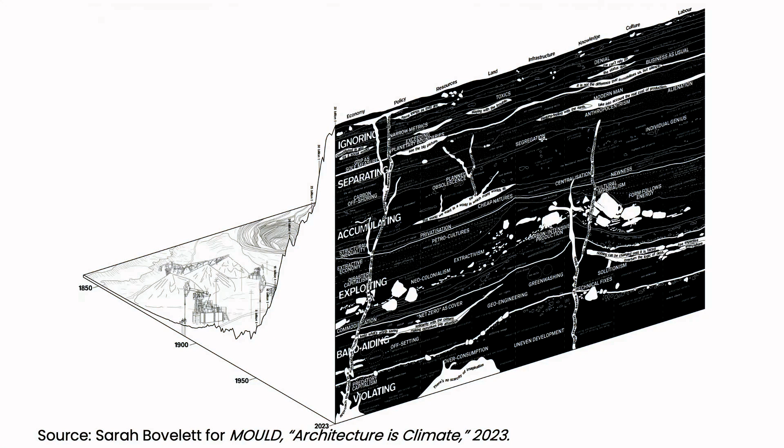And I love this diagram that compresses everything from the 19th century to the contemporary condition, showing how our practice is sort of part of the problem, I dare say. I love our practice because it is so manifold, but we also have to acknowledge that its extractive nature in resources or labor, and the role we play in capital accumulation, is part of trying to understand architecture as climate. So not so much what we can do, but really intrinsically delve into it.

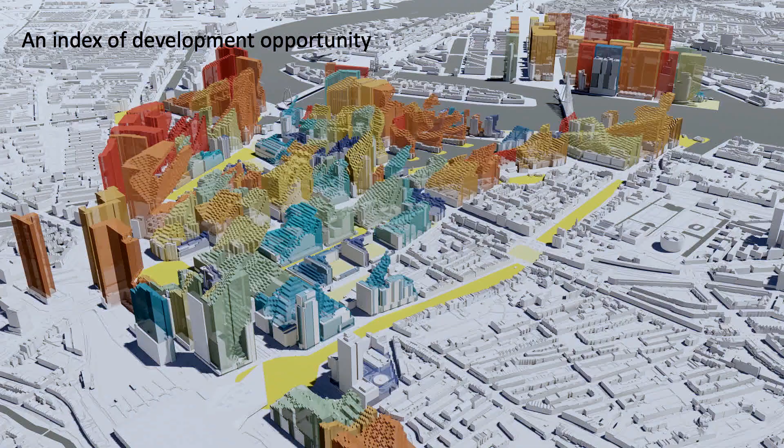And we create software. This is Roofscape. This is software we created with and for the municipality of Rotterdam that actually calculates and quantifies the impact of rooftop policies. We also created Solarscape. This is a software that identifies and visualizes densification potential in the city based on the high-rise regulation and sunspots. We also create parametric urbanism. This is a master plan in Bordeaux that's completely shaped by sun and daylight regulations.

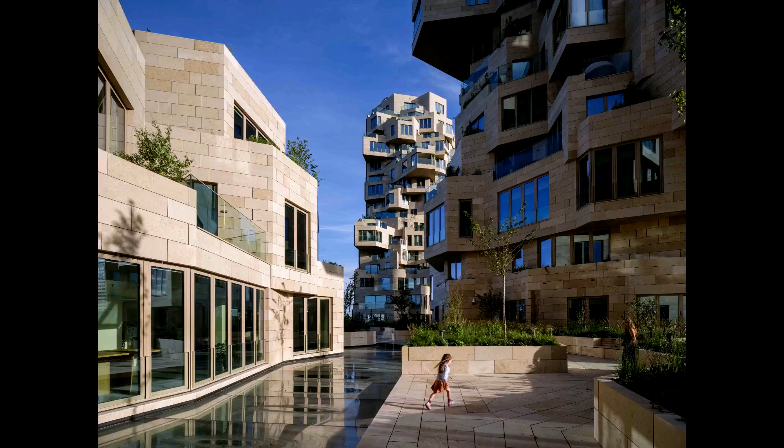We actually created a software that designed and drew the facade of the Valley in Amsterdam. We created a custom workflow from Revit to Rhino to Grasshopper and back that drew 44,000 tiles in 27 revisions, resulting in minimal loss of material.

This means we can do a lot of stuff with computers, and we figured we actually do quite a lot with sunlight, with daylight, with regulations, with materials. We can do environmental analyses.

This is kind of linked to sustainability. So what we did is we actually merged our sustainability group and our computational group together into one group, which is MVRDV Next, New Experimental Technologies. This is not all the team, but we're currently 15 people working full-time on computation and sustainability together.

Sustainability is a fascinating world, a fascinating term. For us, it's a bit like a river. It flows in one direction because it wants to achieve one thing, which is a better world. But if you look at the stream, you see that the water goes in all these different directions. If you think about sustainability, you see that it's such a broad, multi-headed monster, and there are so many things to consider and think about.

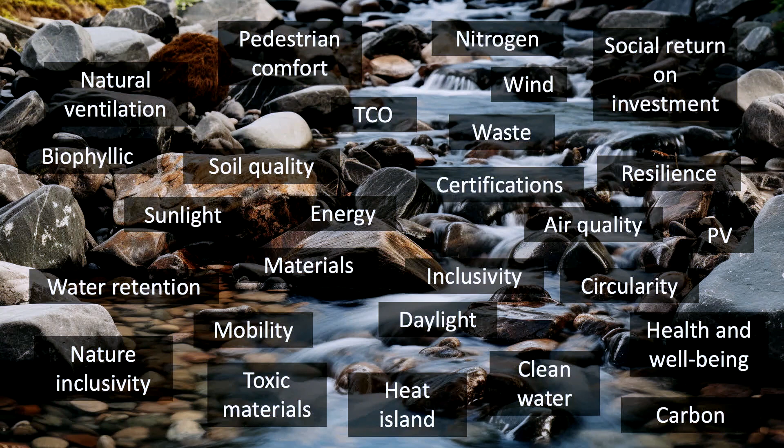You have wind, resilience, social return on investment, water retention. These are all things we want to address as architects in our designs. But if you try to address all of these, you can end up spreading the peanut butter too thin, trying to do a bit of everything, and sometimes you end up with not really impactful results.

So that's why we said to ourselves, we are going to focus on carbon. Carbon is something that is incredibly important. This is causing climate change.

We focus on carbon. There was a big step we took three years ago when we started our core team within MVRDV that researches and works with carbon. We've been doing this for three years, looking into carbon, specifically embodied carbon. Why embodied carbon? Because this is what we draw on a daily basis. This is what we draw and build now.

Then we started to collaborate and talk to people. And somehow, there was also urban carbon and carbon capture, and energy is also kind of related to carbon, and you have sequestration, measuring, software and tools, and before you know it, you're back again into this big multi-headed monster that is carbon.

There we figured out that also here, if we try to do too many things at the same time, we don't get meaningful and impactful results. So we applied some focus again for ourselves, and we said we go back to focusing on embodied carbon. That is the topic of today.

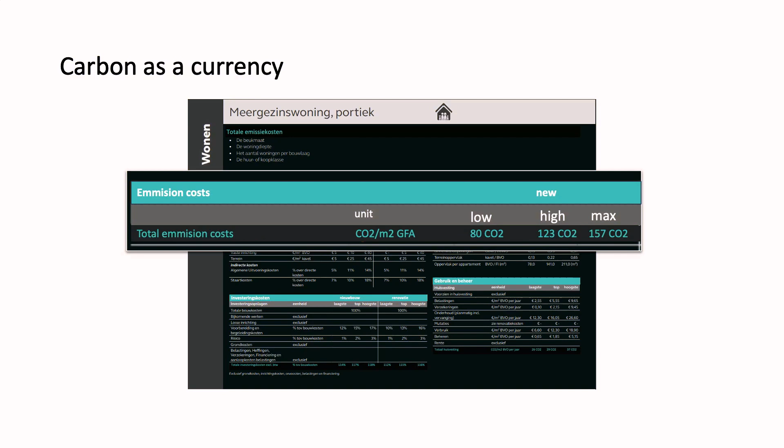When we talk about CO2, we talk about embodied and operational carbon. Embodied carbon is really about the materials, and operational carbon is about your heating cost. Today we're going to talk about embodied carbon.

Quick course: we talk about kilograms of CO2 equivalent, which is not just CO2, it's also methane and nitrous oxide. It's a combination of multiple factors.

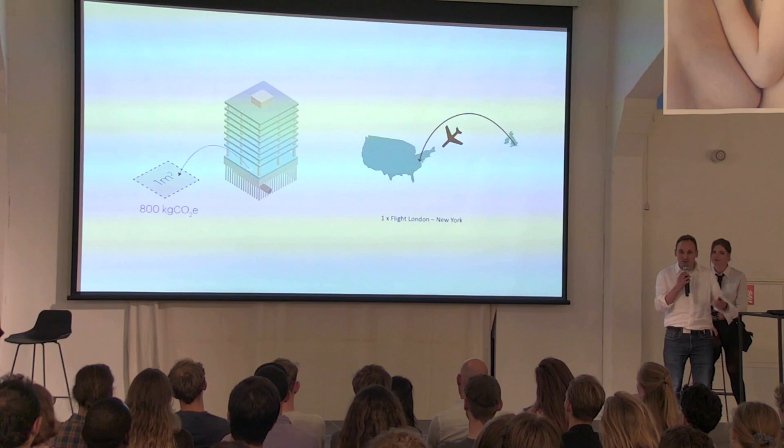Three years ago when we started out, 1 square meter of construction cost about a typical 800 kilograms of CO2, which is more or less a flight to New York. So if you build a big building, it's a lot of flights.

Right now we know where the most embodied carbon is. We know that a huge amount is in the structure, a huge amount is in the surfaces, in the skin, in the space plan. But for us as architects, it's also a bit of a disappointing topic, because a lot of the carbon is in places that we don't really design. It's in places that take up a lot of volume, it's in the floors, it's in the core, it's not in places that we really show.

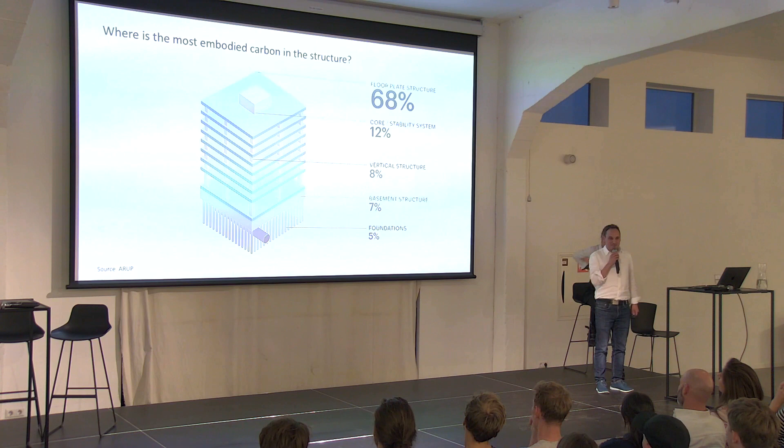Which is disappointing, because if we want to show something, if we want to design something sustainable, we want to show it.

When we talk about carbon, we talk about life cycle assessments, and they generally talk about 4 stages. One is about construction, one is about when we use it, and we also take into account the end of life and recycling. How does that work?

That brings me to databases, databases, databases, databases, and other recurring discussions. I think almost every discussion about carbon starts with databases.

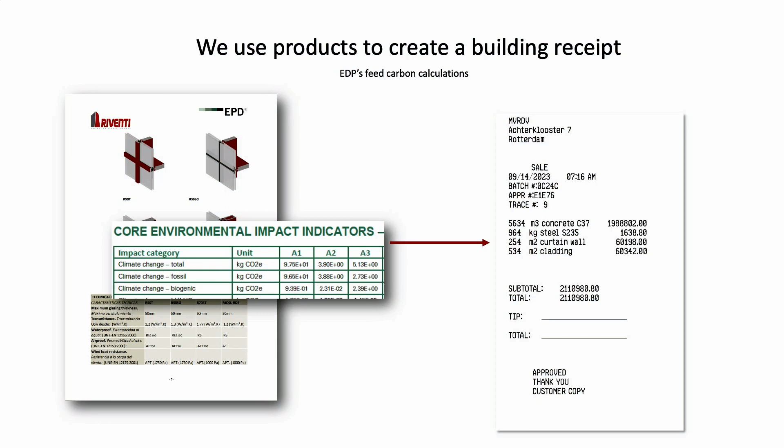We use such an EPD - here is one for a facade - and there are numbers that say, hey, there's a lot of carbon in here. We use this to say, okay, if we have 10,000 square meters of curtain wall, we create a little receipt: okay, 10,000 square meters of curtain wall, that costs a lot of carbon. So there are a lot of databases.

We've looked at many things. There are many databases for every country, many databases independently. So if you want to research this, there are many places to find a lot of sources, and when you find a lot of sources, you find a lot of conflicting numbers.

The way we resolved it is that we operate internationally. We don't only operate in the Netherlands, but for us the most sane choice up to this point is to pick the German database, which is open and has a lot of clear data that we can use to make our calculations.

Basically, what we then try to figure out is how much carbon is actually too much. Last boring part: rules. When trying to figure out how much carbon is now actually too much, let's just first start with the rules, then we can have the discussion of why the rules are not strong enough.

There is carbon legislation coming for a lot of countries. The Netherlands is doing their part, France is doing their part, Germany not, the UK also not. But Finland and Sweden are on board. And to make it really nice to study, carbon is that every country has another way to look at it - you should take different things into account, you should take a different lifetime.

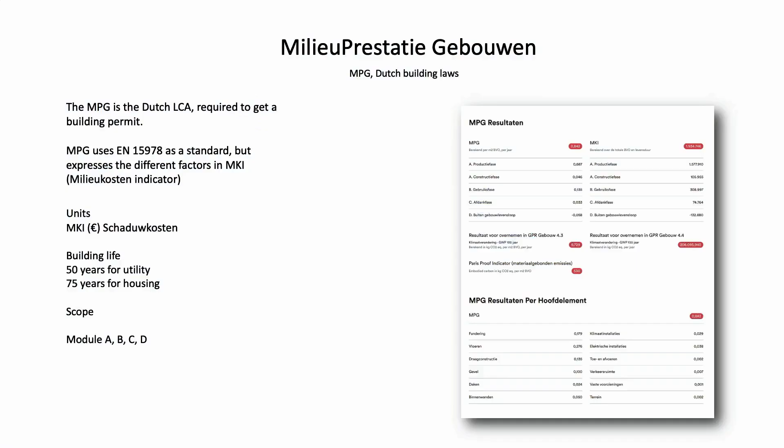The Netherlands picked a new system. We create our own value for carbon, because we don't only look at carbon, we look at schaduwkosten. We make sure we can only use data specifically for the Netherlands, which is a bit frustrating. What the Netherlands basically does is say, well, if we look at an EPD, there are 20 factors we should pick. We multiply it by a factor that no one really understands, but we use it, and then we get a cost, expressed in euros, but it's not about money, to make it very clear.

If you want to translate it back, and this is not correct, but it is a good approximation, one euro of schaduwkosten is approximately 800 kilograms of CO2.

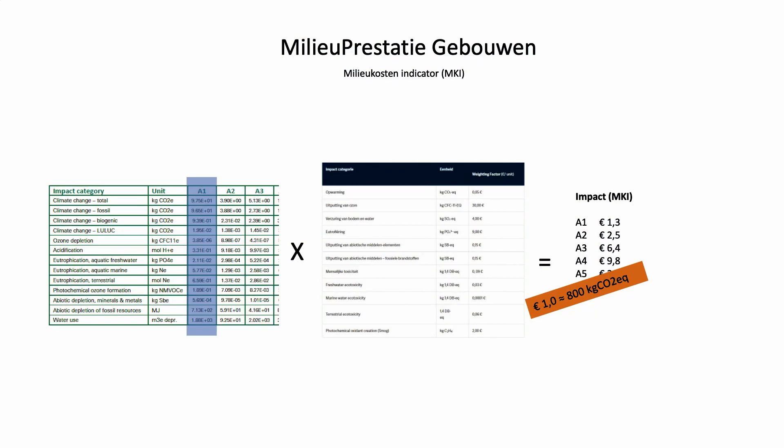Then we have EU levels who said, well, there are 6 standards. This is really not enough, we need a 7th to replace them. They look at 50 years and scopes A, B, C, and D. And I think the one we agree with most is the Dutch Green Building Council, who say, well, we should simplify it. We really need to act now, and we should only look at the A module - what do we emit now?

If we look at how much is much, BREEAM made a baseline scenario which came to 500 kilograms of CO2 per square meter. The MPG started out in 2018 with a very unambitious 750, and this year we get to 600, but in 2030 we probably get to 375, and then for some projects it will start to get a bit adventurous.

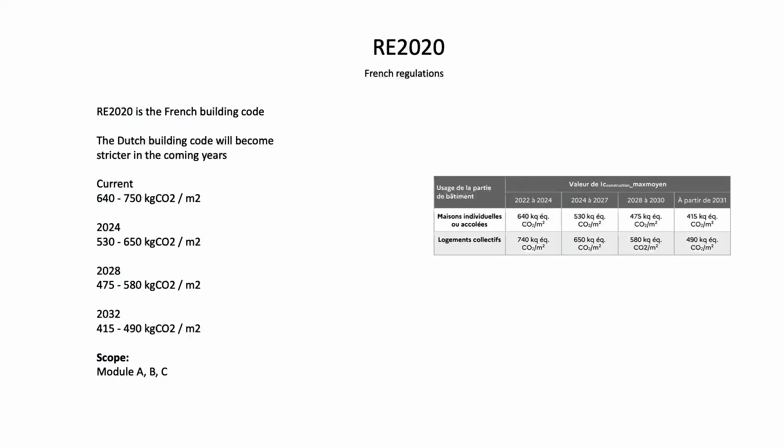France is doing their part. What's interesting for France is that they actually have rules that say, well, once you deliver a building, you also need to prove that your calculation matches what you bring to the site.

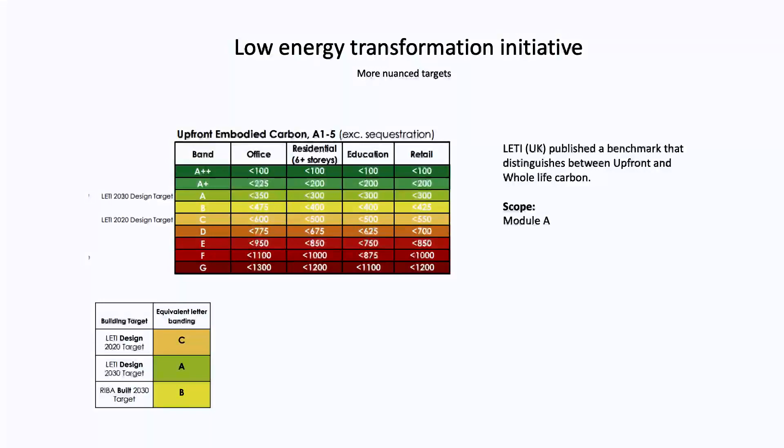We have the RIBA, who are really not ambitious at all. So there's another group in England called the Low Energy Transformation Initiative, and they are a bit more ambitious. And if we put them all together, we basically see that we're okay until 2028, and then things start to get exciting from a legislation point of view.

And then we get to how do we calculate it? Who here ever did an LCA calculation? Can I see hands? That's quite a few. Who enjoyed the experience? Okay, I see one hand.

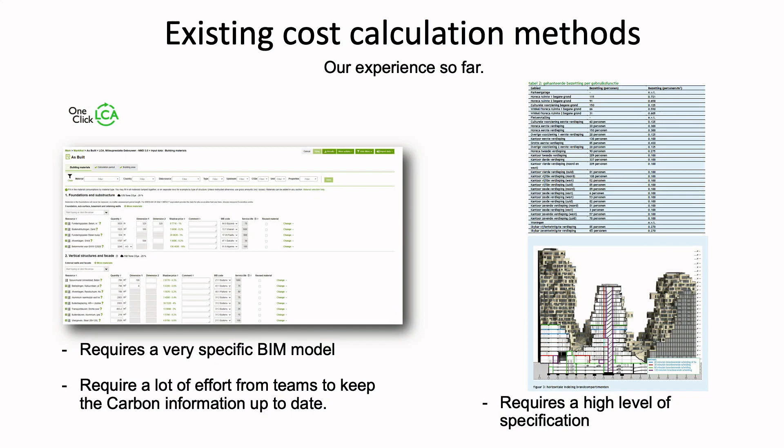Our frustration is basically you turn designers into bookkeepers. What we find is we're starting to design a building, and we search for concrete - you get 955 results of concrete. I think our conclusion is we need less data, not more. We turn designers into specification builders in the beginning of the phase. It's really painful. And once we get a result, it's actually really hard to figure out, okay, what can I actually do about it?

So what did we find out? The heavy hitters, knowing where to look. We looked at 1,200 of these materials, and for us to make it workable, we selected 50. I'll talk about 4.

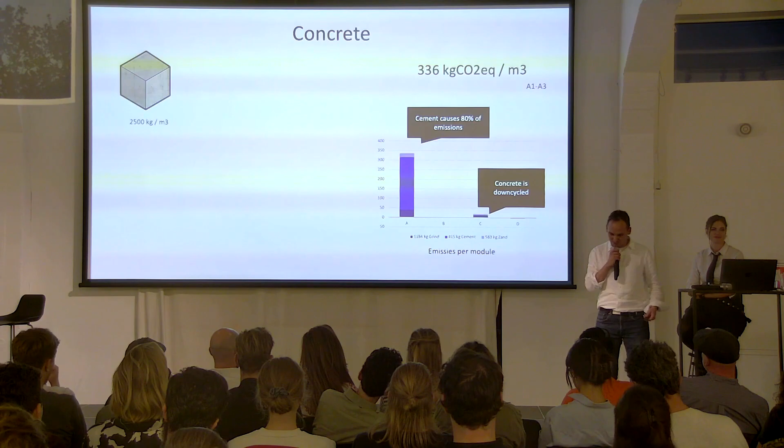We talk about concrete. Concrete is the biggest hit, and the cause of concrete causing CO2 is basically because we barbecue limestone at 2,000 degrees, which emits a lot of CO2, and we use a lot of coal. What you see in these calculations is we have A, which is now, B during the lifespan, and C, when we demolish it, we also emit a little bit of CO2. We use 336 as a number, and we also use some rules of thumb for different kinds of reinforcements, because reinforcement can almost double the emissions for concrete.

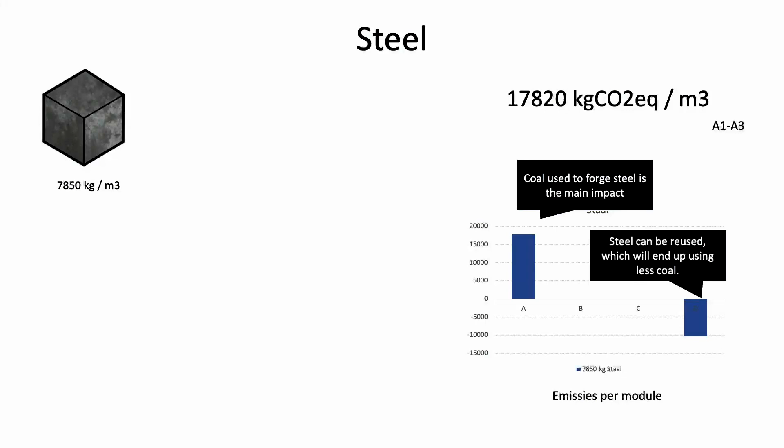We also talk about steel. For steel, the biggest impact is in the beginning. And what we see with steel is that in these LCAs, at the end, after 60 years, or whenever we set our lifespan, at number D, we can reuse it because the steel can be recycled, and the amount of coal that we don't use at that moment we can subtract again. So in some calculations, you can say the impact of steel is really a lot lower because in 70 years we can recycle it.

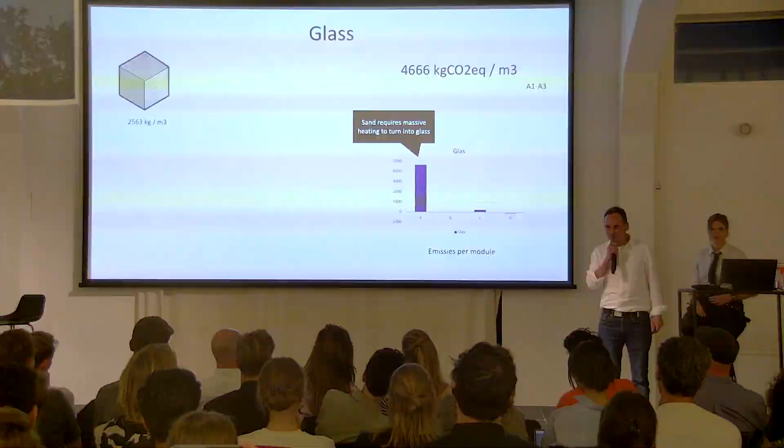Glass is probably a heavy hitter. Well, it's just, again, we use large amounts of heat. It emits large amounts of CO2. That's our big hit, number 4.

And the other thing that almost always comes back in carbon discussions is timber. Timber actually doesn't cost that much CO2 to make. It costs some CO2 to dry. And when some people talk about carbon negative numbers, it is always because of this little thing on the bottom: it's a carbon sink. We say, okay, if we grow wood, there is carbon stored in the wood. And with some creative bookkeeping, we can say that it is negative.

But in fact, there is nothing really negative about it. There's just carbon in there - some carbon has been taken from the atmosphere, but that doesn't really mean that it actually is negative. And the nice thing about that is also for module C, the way we account it generally is, well, if we demolish it, we'll burn it, and that probably means all our CO2 is lost, which brings the interesting thought experiment.

If we would bury the wood, it would be, according to these models, way more sustainable. But then, because we don't have to use gas to create electricity, we can subtract it again.

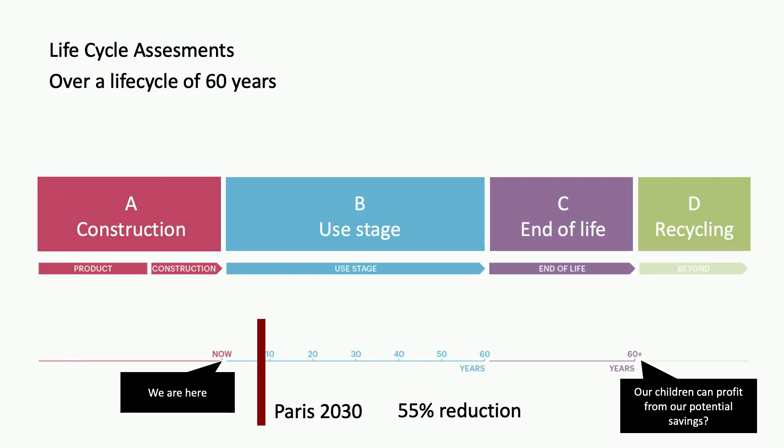Our conclusion is these modules, C and D, they are quite speculative. There are a lot of calculations that go over 60 years, and it doesn't help us for Paris 2030. And in many cases, we use these calculations to speculate for the future.

So for us internally, for clarity and understandability, we only talk about module A. We need to act now. Our point of view is rough is good enough, and we want to know where to steer. We talk about the building parts, the big five, and we want to learn from ourselves. Let's talk about the building parts.

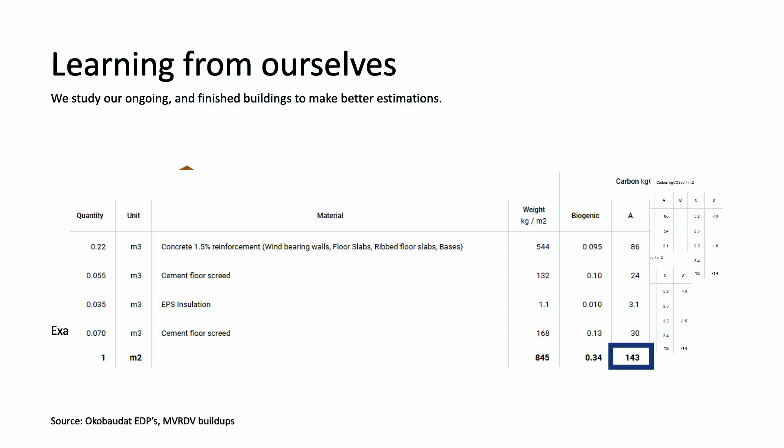We learn from ourselves by just looking at our previous designs and figuring out how much carbon is in there. So how do you do that? You calculate how much concrete is in there, how much insulation, how much EPS. If you make a nice little list, you get a number for how much carbon is in there.

And then we look at the floors and figure out, hey, what can we actually do for the floors? We create a range. We can do full concrete floors. We can also do full timber floors or lightweight floors. And this gives us a range somewhere between 40 and 200.

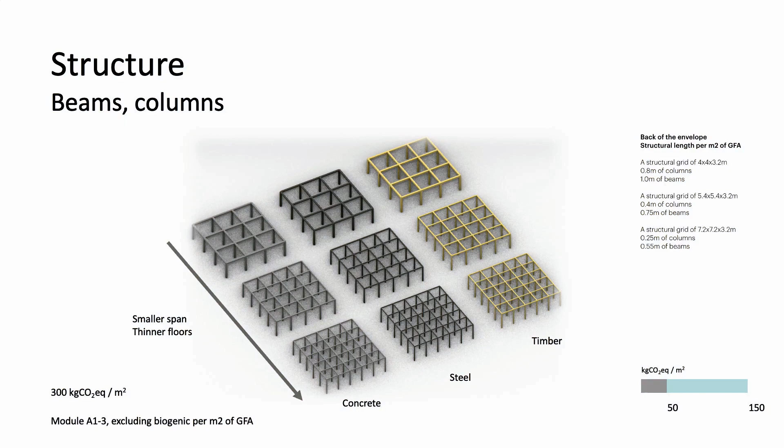We can do the same for beams and columns. We figure out that if you make a bit of a smaller structure, your floor spans will be smaller. You get a bit more structure, but it can give you a big range of numbers. So for the structure, we use somewhere between 50 and 150 kilograms of CO2 per square meter.

You can do the same for load-bearing walls. Do we do full concrete? Do we do full timber? Do we do rammed earth? Do we do straw bales? For this, we can figure out a range somewhere between 10 and 300.

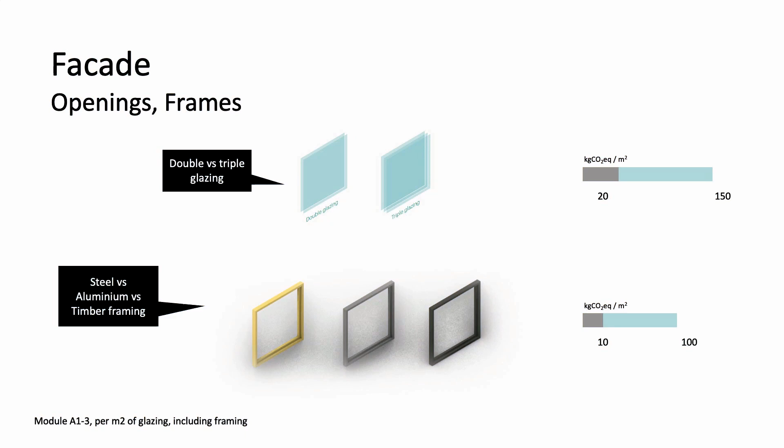We can do the same for facades, double glazing versus triple glazing, steel versus aluminium versus timber. So basically what we do, we looked at what we built and made an inventory of what kind of ranges we have. We can do the same for a facade, for an opaque facade.

It has an inner layer somewhere between 10 and 100. It has an insulation layer somewhere between 10 and 40. And it has a cladding layer somewhere between 50 and 100. And if we add it all up, you get a range for an opaque facade somewhere between 60 and 240.

And if we start to play a game of elimination, we can start to eliminate options. And if we eliminate options, our range becomes smaller. And if we make it smaller, also the total becomes smaller. In that sense, we can adjust our broad ranges into smaller ranges. This is how you would do it for a facade.

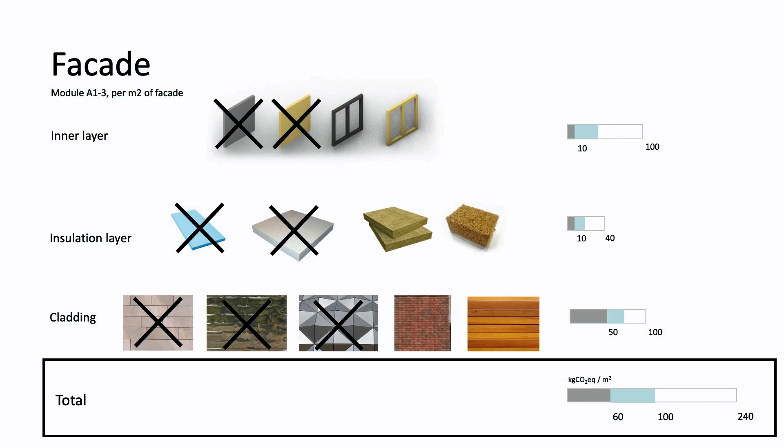And for the rest of the things, we use rules of thumb. Foundations are always difficult - we generally don't really know how much is in a foundation. We know it afterwards, when we get the structural engineers on board, but not during the time. And we can do the same for installations, which is generally quite hard to get information on.

So how do we use it in a design? This was the big databases part. How do we get all this data from data to knowledge? We created a little plan on when to measure what, so we don't measure everything all the time.

In concept design, we basically define a material diet where we say, well, if we find out that different locations have different potential, we figure out what we can actually do here. For example, in China, you can build with timber.

In other places, for high-rise, it's highly unlikely that you're going to make it full out of timber.

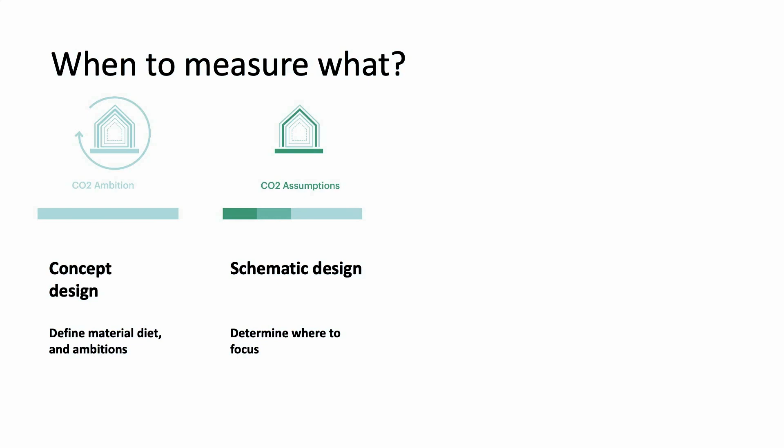In schematic design, once we have that figured out and we have a volume and some idea how big the building is, we'll do some calculations to determine where our focus will be. In detailed design, we start to optimize, and we basically already have a design and can really start to reiterate what is best. And all the way at the end, we do full LCA calculations, as most of the time will be needed. This is what we mean with material diets.

We talk about different scales, different sizes, and different scales and sizes also require different approaches.

If we look for full biogenic materials, we have not found it reasonable, for example, to do that at large scale. Unfortunately, we're still always bound by concrete in many cases because of fire regulations, strength regulations, earthquake regulations, and acoustic regulations.

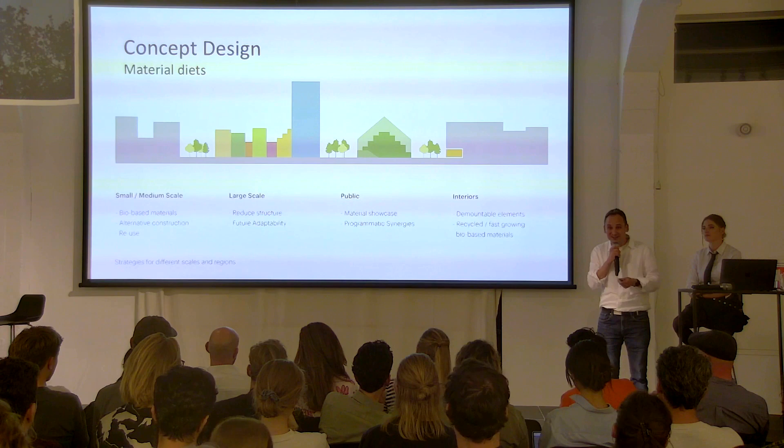On the small scale, we really try to go for bio-based materials, for alternative constructions and reuse. For public buildings, we try to showcase materials or find programmatic synergies.

And for interiors, this is really a showcase for us, the best part to go for bio-based materials. It's generally short-lived and demountable.

How does that work in concept design? We go back to modeling and practical stuff. What we found out is that it's really hard to do an LCA calculation because we have too much data. We have huge BIM models which tell us a lot of things, and it's too much. And because it's too much, you can't really make any decisions. So we worked with TU Delft, with Halina, to figure out a way to simplify this.

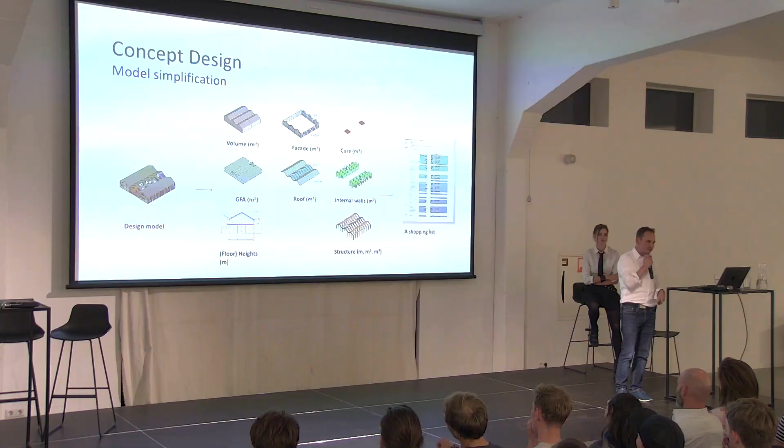What kind of metrics really drive carbon? What we basically do is take a model, simplify it to simple metrics, and with these simple metrics calculate how much carbon is in there. Because we simplify it, we get an Excel sheet with basic metrics. If we multiply our basic metrics with our ranges, we get an estimation of what is where - how much is in the superstructure, how much is in the skin, and more importantly, what can you actually do about it?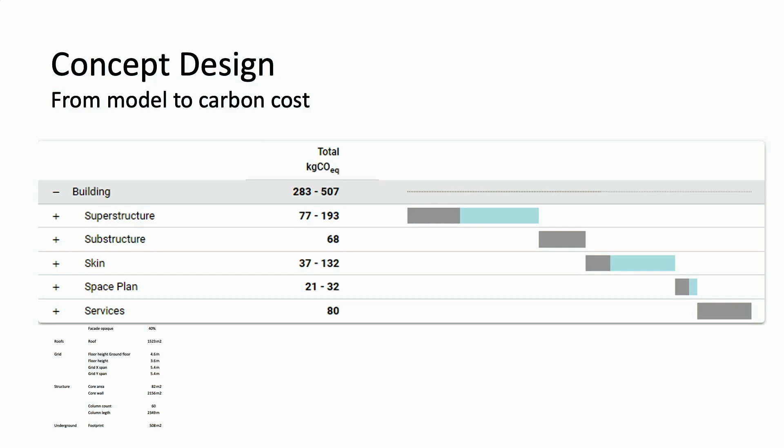For example, an office building - it's a real case with a fake image - where we calculated our numbers and figured out that we can save somewhere between 280 and 507 kilograms of carbon. Well, that's nice, and where is that? A lot of it in this case is in the structure, and a lot of it is in the skin.

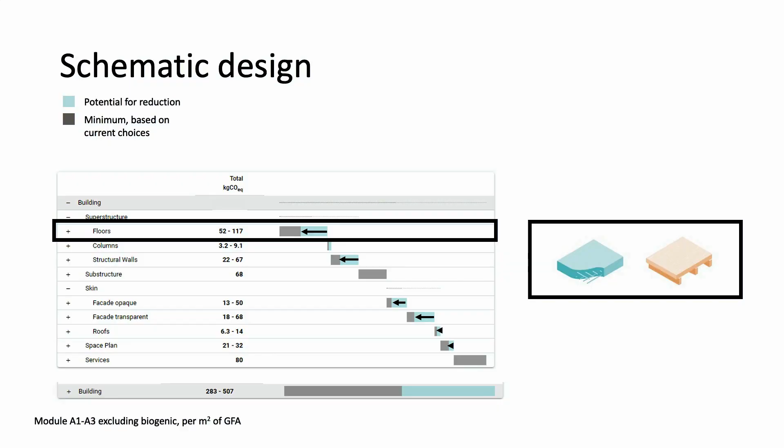And what can we actually do about it? For example, the floors - if we would go to timber, it would save almost 60 kilograms of carbon per square meter. If we look at the walls, that's also a huge impact in this case. Columns, not so much. Substructure we can change in this building.

For the facade, this is a comparison between full concrete and full bio-based. How much in detail do you want to go?

You have 5 minutes left. Yes.

Thank you. Wrapping up - and we can also do that for transparent facades.

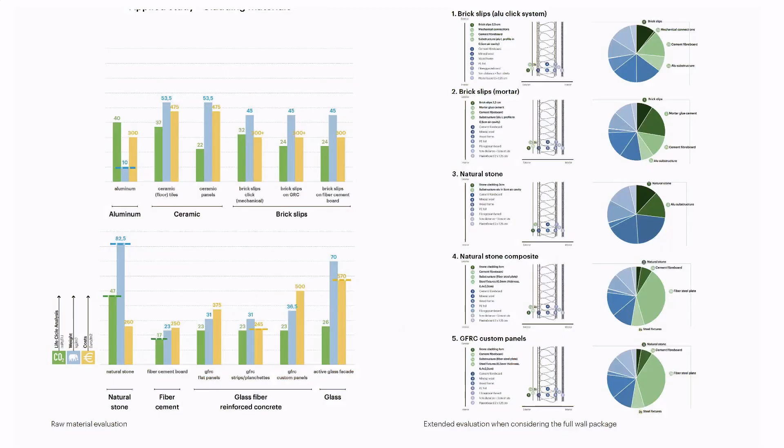What did we learn? We can measure everything. We do measure everything, and we can measure everything at all moments. But the main thing we learned is that using these strategies, we saved almost 50% on an ongoing building, and we did that by doing very simple things - by looking at the detail when we need the detail, and by looking at the biggest impact. And it's not rocket science.

Thanks, Arend, for this deep dive. I will quickly wrap up after this super hardcore course in numbers and how exciting carbon numbers can be for architects.

Asking the right questions for us is very tricky because we work in 47 countries all over the globe with different regulations and possibilities. That's why we developed the MVRDV carbon guidelines that we will be sharing with all of you today. They are by no means true or false, and they don't pretend to be an answer, but they offer different kinds of strategies that you can apply to your project depending on the context.

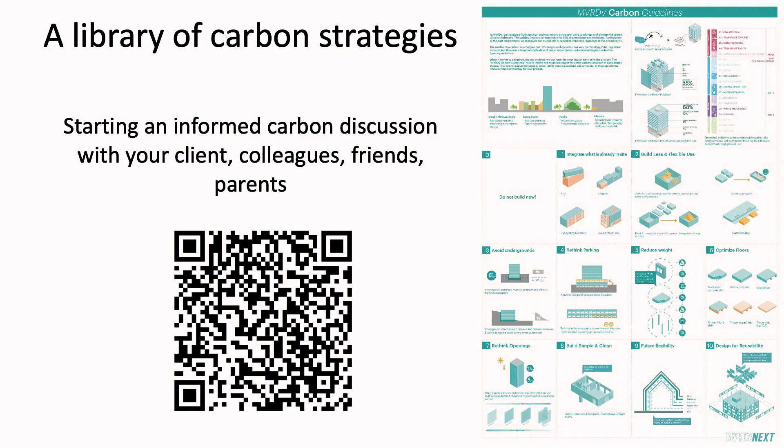We have looked at material diets and how we try to change ourselves, and how we try to respond to carbon in architecture. On a small scale, we built with wood. In countries where wood is not available, like China, we worked with rammed earth.

On a small scale, we use old beer bottles for a building in Bulgaria. We use recycled plastic tiles in Germany. We found some loopholes in the regulations to make this possible. We use reused and recycled aluminium in Germany.

In this project, an AI campus in Germany, we're actually combining different strategies together. Here we have timbers, timber hybrids, and two rammed earth buildings. The fact that we are learning these things and applying them through learning by doing is very exciting for us.

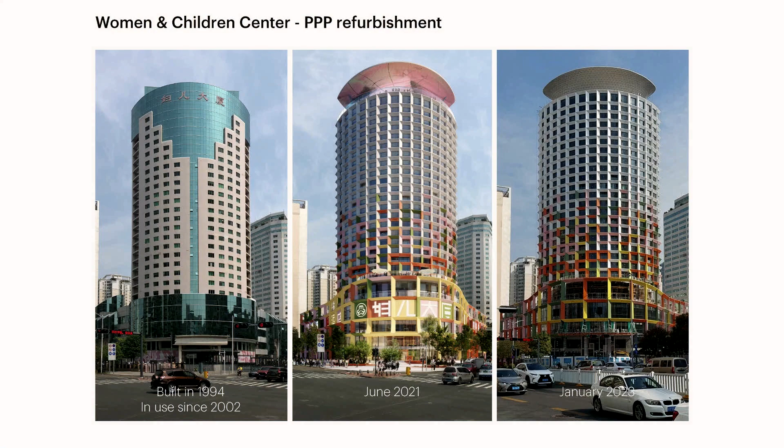We're also going through a transformation wave in China, where we repurposed this building and saved it from being demolished, saving 11,800 flights. Do not build anything new.

Actually, I saw someone on LinkedIn posting, based on my announcement, saying 'why are you talking about carbon, because you still build things, and this is not right.' In an ideal world, yes, it would be fantastic if we could only do transformations. Why not? Let's think about it.

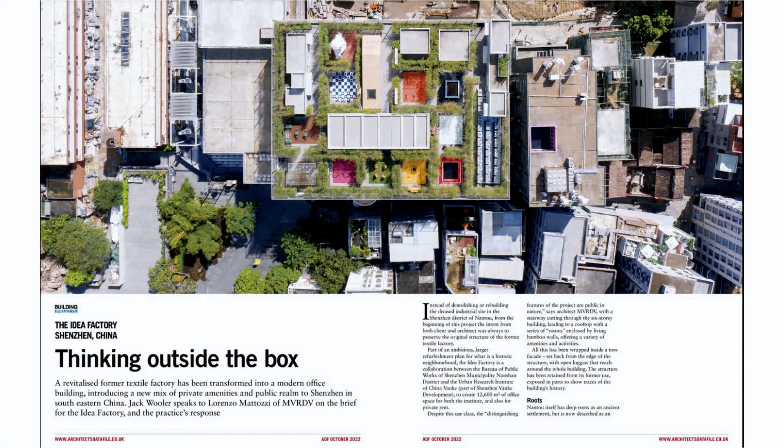This is a building in Shenzhen, China, that we transformed from a textile factory where we also introduced a green roof. This was picked up by the media as an unconventional approach in Shenzhen, where the fashion is to demolish and build new.

Integrate what is already on site. Here we transformed a building pit in Taiwan into an urban spa, and we actually left everything of the demolition on site, so all of the old construction is there.

We reprogrammed a derelict flyover in Seoul into the green High Line of Korea. We reprogrammed a space underneath the flyover in Mumbai.

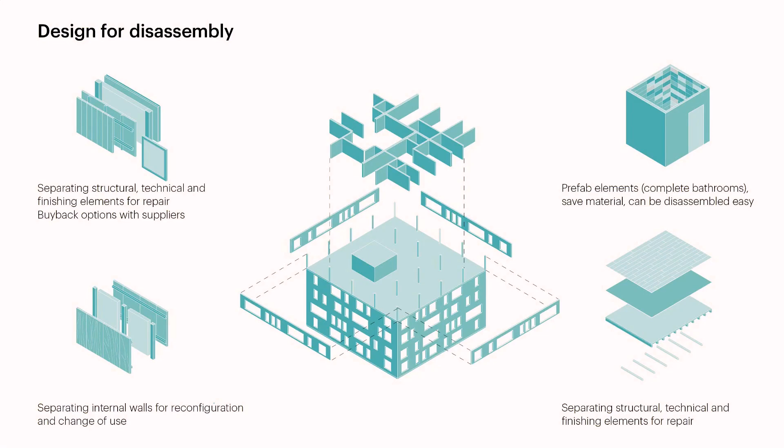Designed for disassembly, this is our first completely demountable project in Amsterdam. This is Matrix 1, so we look into the world of circularity. Is this the answer? We don't know.

You could say designing for disassembly requires more carbon, so this is an interesting discussion to have afterwards, I think. Or we design for longevity. This building can be completely reprogrammed to fit the current program or many other programs due to the external circulation.

Avoid undergrounds. We didn't build a basement here. The building would probably have been smaller if we had, but we didn't do it. Rethink parking. In the 90s, we already introduced puzzle parking in Silodam.

We introduced reversible parking structures in Bordeaux. Parking on the first and second floor in Sri Lanka here. So try to avoid undergrounds.

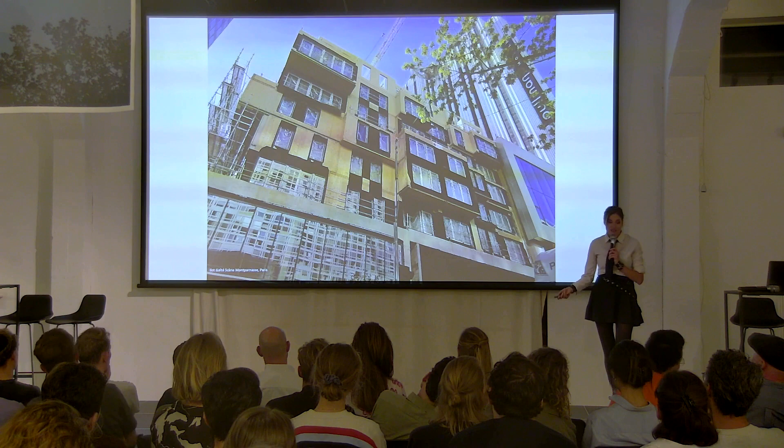Reduce weight. A mass timber project in France here, and what you see on the inside, you can actually experience the timber. Big savings here by applying CLT floors, lightweight facades, and saving on foundations. So these are things we are currently doing, looking at floors - indeed, floors, we love floors.

And then finally, the money question. How do you convince people in the sustainability and carbon discussion? Because it is not rocket science - we have to build less, we have to transform, we have to work with wood and bio-based materials. And what we often run into when we discuss this with clients is they say, okay great, how much does it cost? This is more expensive.

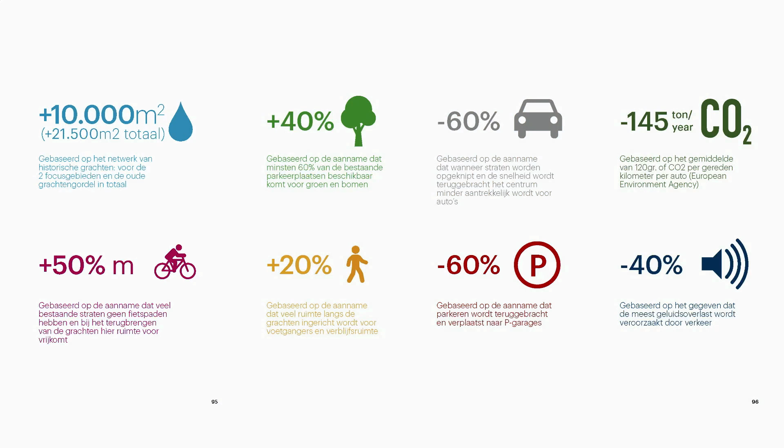We found that in this project in Den Haag, where we are proposing to bring back the canals - fantastic, why not? We quantified the impact of such a proposal: look how much carbon we can save, how much fewer cars, good for mobility, for ecology. And in the end, we were able to convince the city council not with this, but with this.

Which is indeed the quote from the campaign manager of Bill Clinton: 'it's the economy, stupid.' By showing that this project is not only good for the environment, but can also generate a local economy, this is still a very interesting topic to convince people with. So we're also very curious to hear your thoughts about that, and let's discuss this.

Final slide. What are we going to focus on for the coming time? We know that embodied carbon is our focus. What we are already doing is focusing on lightweight, bio-based materials, and transformations. The things we still have to become better at and learn are the topics of fear, uncertainty, and doubt.

If you propose something new, you get a lot of questions, and people are afraid to try something new - tech and regulations, especially across 47 countries, and costs, and how to actually utilize that as an argument to take the next steps. Having said that, this is the QR code to the guidelines, and this was the end of our lecture. Very curious to hear what you think. Thank you.

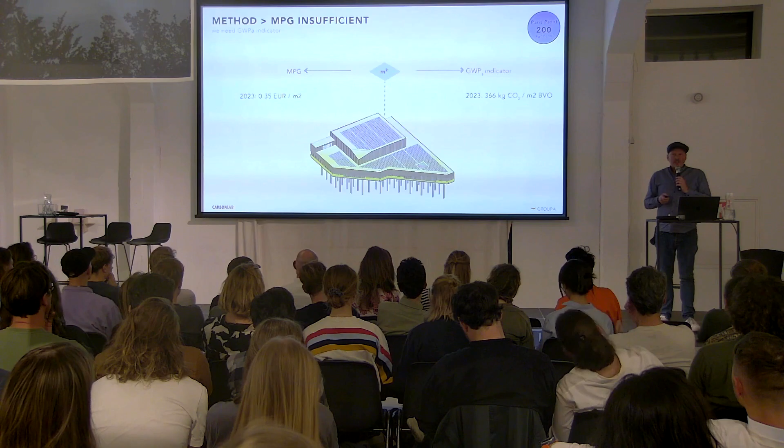I think this one, for architects who are new to the subject, is a very important one. The current Dutch regulation of MPG is not sufficient to achieve what we all need to achieve. This is a project we have, I will show you more about this later. It's a distribution center near Rotterdam, where we have an MPG of 0.35. The current regulation says 0.8. So actually, we're doing pretty well. We're really proud of ourselves.

However, if you only look at the global warming potential, only at the CO2 exhaust, we're at 366 kilos. And we go that precise at the moment, which means we go almost twice as high as we can to stay within Paris. So that's something we have to take into account.

Another subject which is very important, and that actually just came up with the wood remarks that were made, is the biogenic emissions or the biogenic storage. If you work with wood, if you work with bio-based materials, you're actually storing carbon. Dutch regulation doesn't allow you to calculate this in your total volume of CO2 exhaust. We think it should be different. And yes, there is a question, what happens to the materials at the end of the lifetime?

There are solutions for that. To give you an example, this is a project by Mei architects, so not by us. And the people of the city of Rotterdam continue to tell us, based on this example, wood is not sustainable - steel and concrete are better. Very questionable.

Another part of our method that we had to deal with is: do you measure within the Dutch regulation, including all the parts that you don't have to calculate, or do you actually calculate everything? In this example, 34% of the actual emissions of the building, you don't have to calculate for your building permit. That's a bit strange.

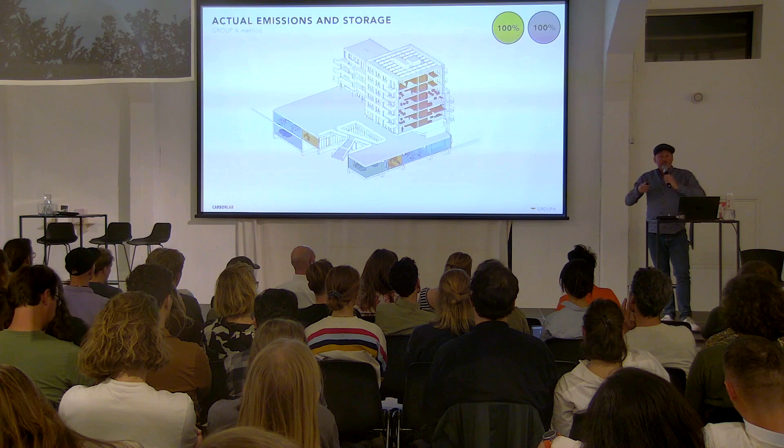If you have a method, you need to have a database or a calculation tool that can work with it. We made an overview with our team of all the different software that are out there. It's actually quite boring, but in the end we found out One Click LCA ticks all the boxes that we look for - not in the least because it combines databases from all over Europe. So we can work with the Dutch database, but we don't have to. Due to the quality of the data, that's really important.

Now we'll take you through a few calculations of a few of our projects. These are running projects that started before we had the Carbon Lab. We started calculating what we have on our drawing boards at the moment, and it was quite a shock, as you will see.

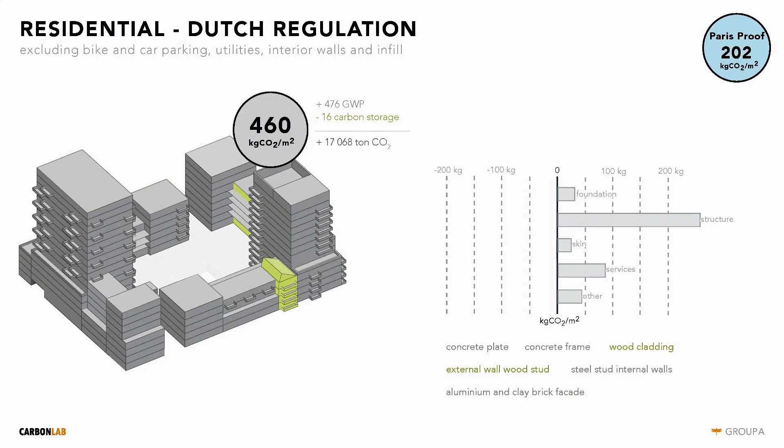This is a big project, a residential block with parking, commercial spaces, bicycle storage, and shared amenities. According to Dutch regulation, it's 460 kilograms per square meter, more than twice what's allowed within the Paris Accord. If you calculate everything, which we do, it's 540, almost 3 times the number.

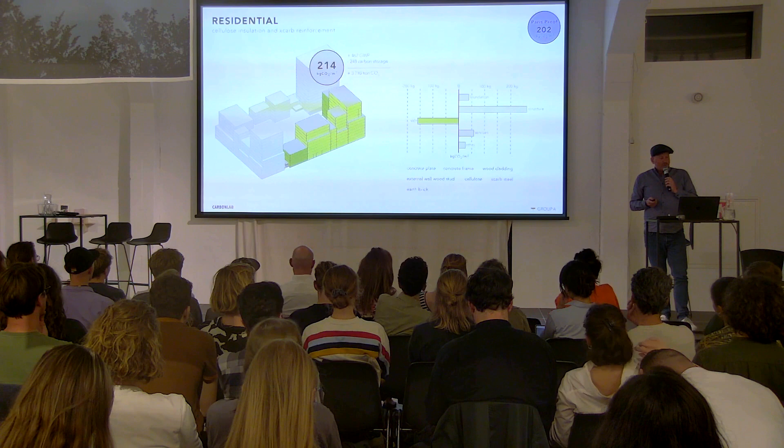Pretty shocking. The block next to it, we're also designing. That's a bit earlier in the process, so there we started to look at what we can still do. When you have the number, how can you change it? This is a similar program, and here we could still look into changing facade elements and having more recycled elements. So basically doing the same exercise: what is the low-hanging fruit, what are the real big hitters, without going into all the individual elements.

A completely different project we do, which we showed before, a big distribution center. We first calculated what happens if you build a stereotypical one, just a shed. De verdozing van Nederland. You get a building which is 3 times over the actual target of the Paris Accord. We advised the client to make it much more compact, like what we did in the earlier days with the Van Nelle factory, much more compact, several levels. We cut it in half.

Then we looked at what happens if you make it completely bio-based, because that is the trick to reach carbon negative. We actually achieved it, but I must say this is a very ambitious client—well, he's not that ambitious. They took out a lot of these elements, so we're not going to go carbon negative with this project, and I think we also need to be clear about that. We need to learn to tell stories. We need to convince clients based on data, but also on seductive answers to make these decisions. We're not there yet.

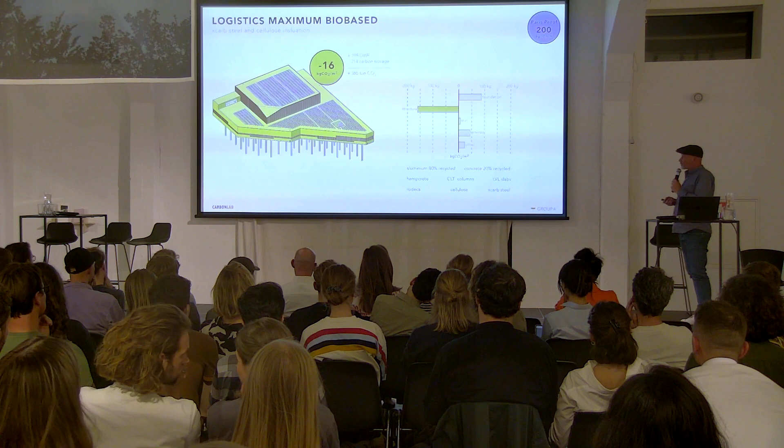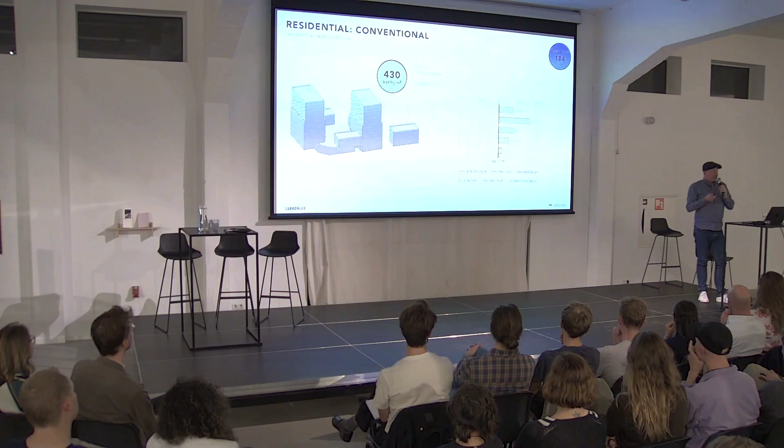We would reach 430 kilograms per square meter. If we go fully bio-based, minus 61—that's where it really becomes interesting, you go below 0. Plus, we are researching with Climate Cleanup how we can make this into a carbon credits project, to see how we can market the storage of this CO2, and what that does to the business case. Is that an interesting difference for our client?

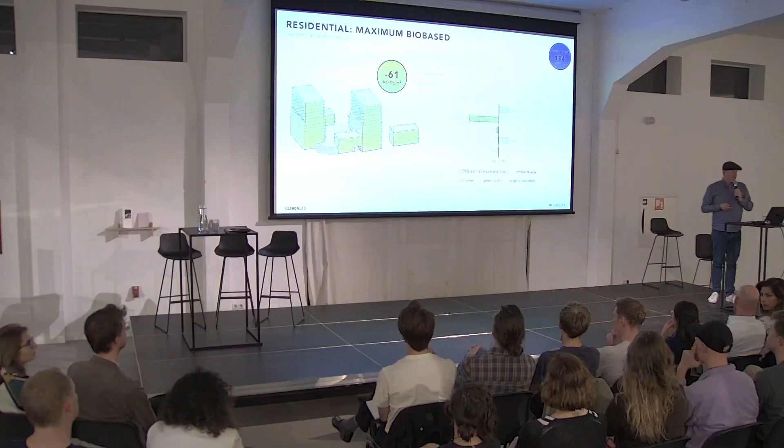So far we talked about buildings, but buildings aren't everything. What's actually quite important is to understand that before we start drawing a building, a lot of decisions have already been taken. Before we reach the PvE program of demand, we already have a lot of decisions taken on the urban level. So the question we should really ask ourselves is, how do we want to live? How do we want to structure our society in the future if we look through the lens of carbon?

We looked at this question very high over, so take these numbers as a benchmark, not more than that. What happens if you calculate very low density, like Phoenix or lower? You get 741 kilos per square meter, because living in separate houses is very material inefficient. If you look at the other side, this is a Viñoly Tower on Manhattan—sky high carbon per square meter because you have to build extremely material intensive. Or what if you look at the urban block? This is the Barcelona block, and it's by far the most efficient in material. All of these numbers are for conventional building, without calculating the actual urban infrastructure.

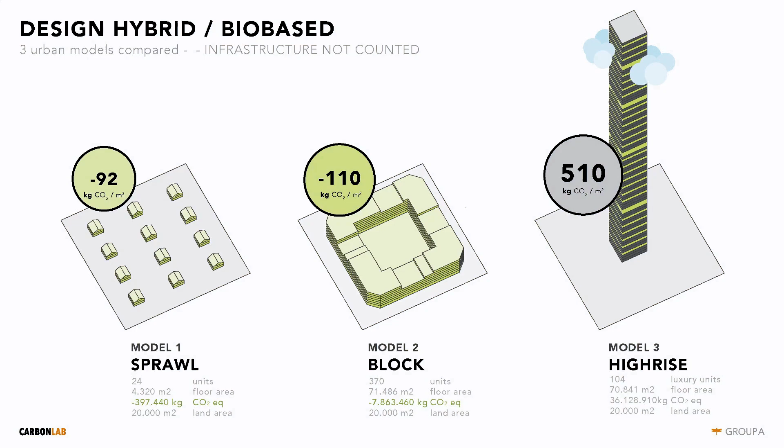What then if you make them bio-based? What if you recycle a lot where possible? Then you get completely different numbers, but you still see that the total numbers of both apartments and actual storage of CO2 in the middle block are much more interesting.

That's of course not the whole story, because we live in these cities, we move around in these cities, we consume in these cities. All those numbers you should actually take into account to get the real full picture if you want climate positive urbanism. We are taking this to another level based on a case study at M4H, this actual area where we are today, because this is a plan being developed at the moment. Tendering will start for different plots, and we want to see how can we make this happen—not in 2050, how can we start today, on a scale that's overseeable and forces us to take decisions relative to this scale. Otherwise, as the predecessor said eloquently, you lose yourself trying to do everything everywhere.

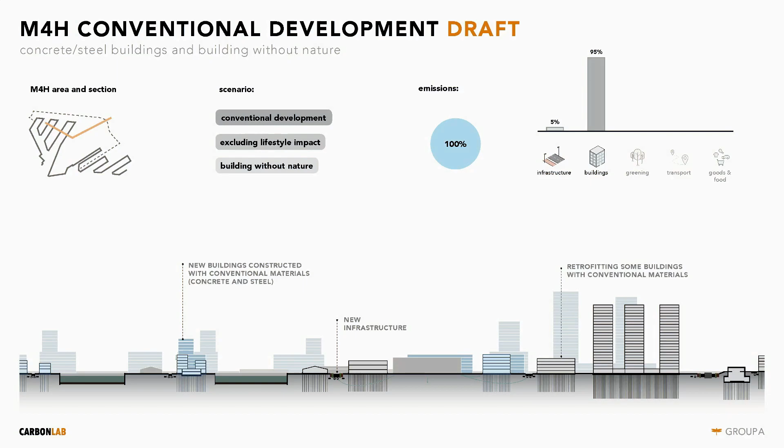We have made first calculations, still in draft, where we first see what happens if you only calculate the buildings and infrastructure materials. The emissions are set at value 100. We don't put the numbers here because we need to be more precise in the future, but we try to achieve an overview of what kind of tools we have at our disposal and how they relate to each other when you put them next to each other.

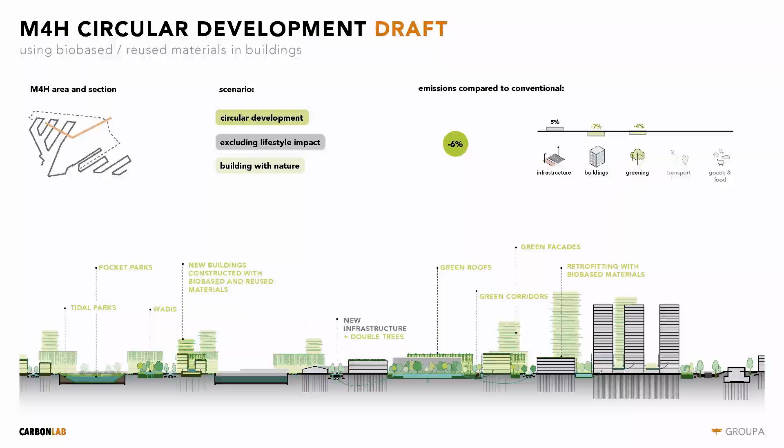If we involve nature in the numbers, the green is for many reasons an excellent idea, but it doesn't really make a difference next to what you emit with your buildings. So the next step is: what happens if you make it a circular development with a lot of recycled materials and bio-based components? Then you really drive the numbers far down, if you include biogenic factors.

If you look at what people actually do there, what do you facilitate with your urban development, with your buildings—what kind of lifestyle do you facilitate? If you look at a conventional lifestyle projected on M4H, people have a car, maybe 2 or 3 cars, they eat meat every day. Then the actual numbers go from 100 back up to 230. That has a lot of impact.

This is something City First is also looking into in detail: what happens if you facilitate a different lifestyle? These are still extrapolations, but you can cut those numbers roughly in half by sharing amenities, having different diet options, actually facilitating those in your urban environment. But interestingly, you still get back to 101%, so you're still emitting. The question maybe is really there.

We are soon organizing in this room a serious game, including clients, entrepreneurs from the area, and people from the city of Rotterdam, to play a game where we actually have to get to a zero development. It will be a very interesting pilot project.

Suppose you've listened to all of this, you've listened to MVRDV, and you'll listen to the next speakers, and you think, this isn't really about us, we have a good portfolio. I want to end with two thoughts. This is an example from London this summer, where the minister responsible for construction halted the demolishing of this building, arguing it wouldn't fit the carbon ambitions of Great Britain, and that the architects should go back and research if they could reuse this building and add levels on top instead of a new build. I think this will happen more often.

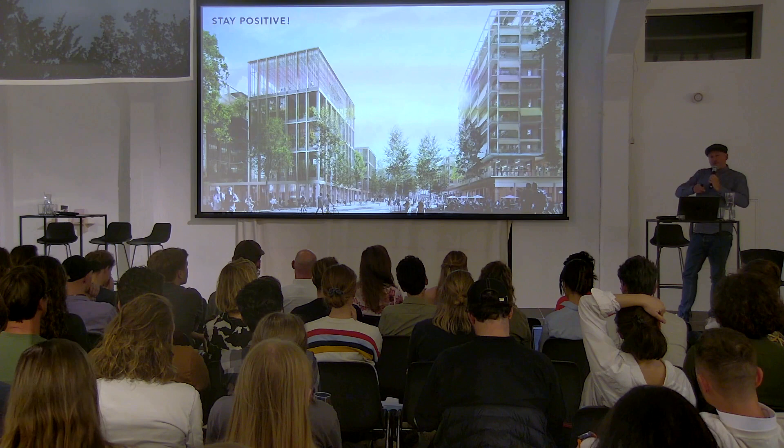And there's a good example of hope—it was mentioned before, France is really ahead of us. They have excellent regulation since 2020, and it really pays off. I am there very often, and I have spoken with architects. They are doing a lot in wood, not only expensive projects but social housing, student housing, hotels. The entire Olympic Village is made of wood, there's a wooden swimming pool. So for different market segments this is possible, and the whole ecosystem of building is changing in France. We can do the same in Holland. Thank you.

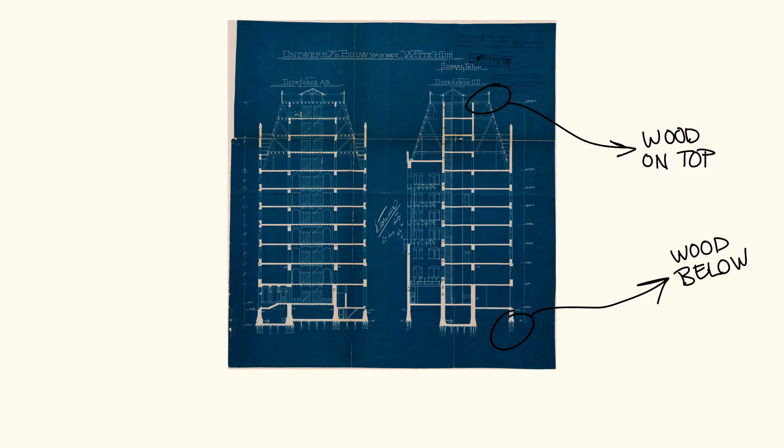Architects don't like to go below, let's say, ground level. We have no idea what happens. We leave that to the structural engineer.

But if you would have to draw it, it's roughly, let's say, 1,000 wooden foundation piles in the building. So about 15 kilometers in a line, which doesn't take me all the way to The Hague, but a long way there.

And it intrigues us because we don't actually draw it in plans, whether it's an architectural isometric view, a section, or a building permission drawing. It's always cut off. We think this relationship between what happens on the top and the bottom should be visualized in order to be able to talk about it.

But to have some sort of numbers on the line, it is about 3 hectares of forest, pure forest, that had to be cut for just the foundations alone for this building.

There's an interesting story that botanists always complain that architects don't know that a tree has roots. Yeah, we sort of have seen that in buildings and high-rises as well. They have to go in pots.

That's not really how the trees would like to form, which is very similar to the foundation poles of the buildings. These are two trees, the spruce on the left and a larch on the right, that have been used for foundation poles because they're nice and straight and roughly the length that allows us to go deep enough.

And you see the root system is quite vast, and you can even use that to make more hardened tar, for instance, to treat material. Anyway, so if we cut the trees, we put them upside down, then we have our foundation poles.

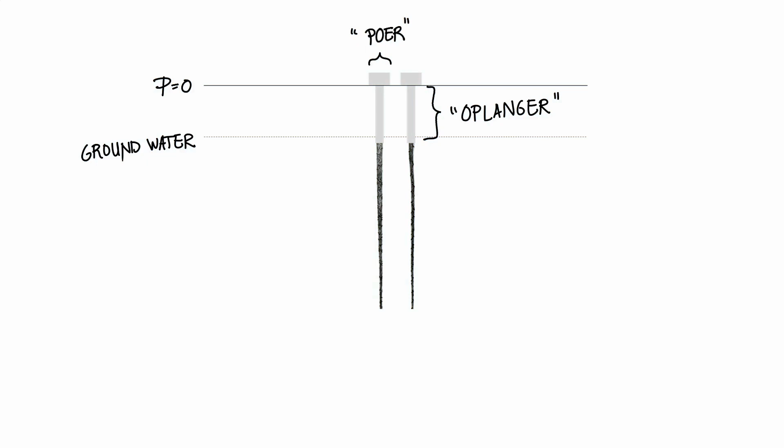to make sure that the wooden foundation pole is always fully underwater. And then you could add, if you want, a poer or another pile, a top on as a base for your building. And if that's about 30 centimeters away from the ground level, then basically that's everything you need in concrete.

And the rest can be made in a bio-based material, raised from the ground to avoid the sensitive parts of the floor rotting. So you can make wooden floors, wooden walls, wooden roofs, and so forth.

So that's what we've tried to do, and it's kind of interesting that we realize this is a very archaic system. There is a little bit of innovation that happened, but it's really just the top, and the rest is still the same. And to prove that we work that way, it's not easy also with regulations, by the way.

It's quite a lot of concrete, and so we can calculate how much it saves. But yeah, we basically thought, okay, let's just get rid of the concrete and see how we can get there as far as possible. And I guess in an office of 2 people, that is possible somehow to experiment a little bit more sometimes. So now in all our projects, we draw these foundation poles in.

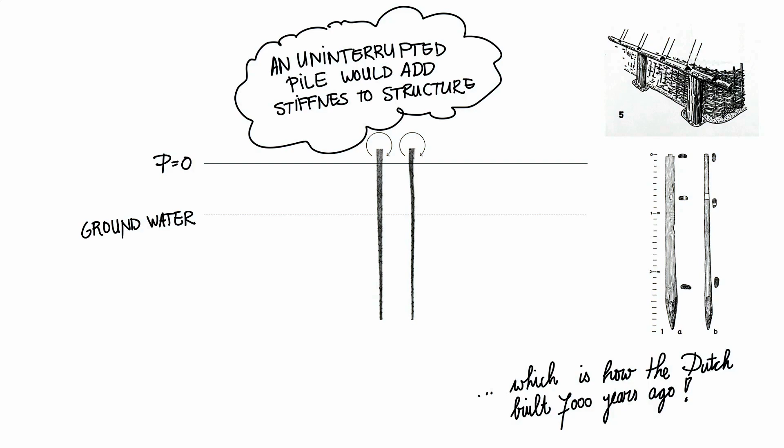Now, it's so old that, let's say, we have evidence of 7,000 years ago that people used wooden foundation poles for their houses. And what is interesting and striking is that they used the foundation poles also to their advantage.

So it's not just that they put them in the ground and they have a sort of base to work with, but they also use the stability of a rammed pile that went into the ground.

So these were obviously full-length wooden poles. Here's an example. This is in the north of Germany, in the Feddersen Wierde. It's about, roughly, Iron Age, so thousands of years.

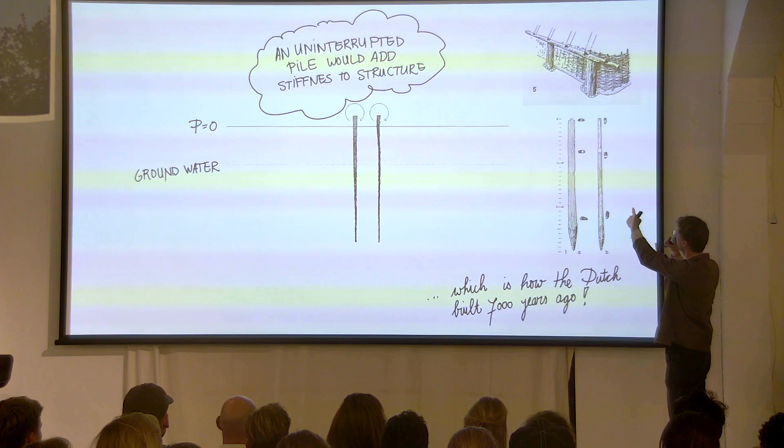Not that old, but you see that the pile itself, the wall was about a little less, let's say 75 centimeters tall, and the rest was rammed into the ground to create a stable structure. So the stability of the structure came from the ground, not from the roof structure.

This is a bit of a detour, but yesterday I had my first experience digging up an Iron Age house myself in Belgium, in Sint-Gilles-Waas. I had the pleasure to be invited, I thought, to analyze the reconstructions, but I actually had to do a lot of work. And I found my first pottery, 2,000 years old.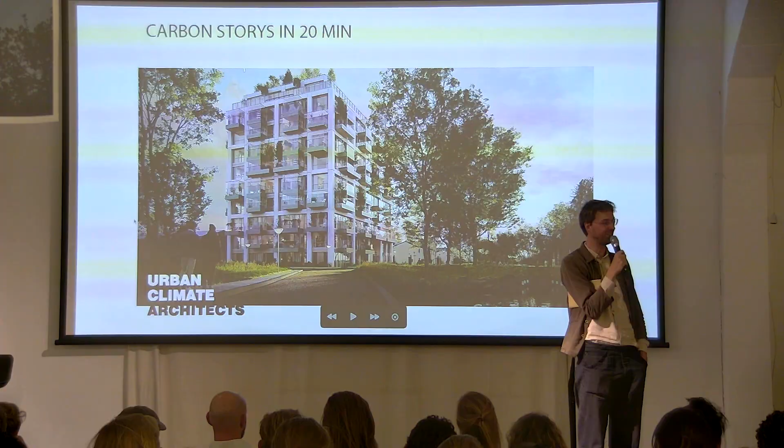You have to use contemporary tools, obviously, and see how you can play with that. But it's just so interesting. Also, the archaeologists really need help in understanding these buildings, so it's an architectural task in itself. To understand history, I think, is a beautiful thing. You don't have to have a purpose, per se.

Any questions? Yeah. Now I have to fill out the reference. You wrote it down, or you? This is a lot of text. You're not going to ask all of this, right?

No? Okay, I was recently watching a seminar about low carbon foundations, and they do similar projects in terms of size as you do. I found it super interesting because I didn't know anything about foundations. But they had found disused electric poles, timber poles, and they had covered them with bituminous sheets. Have you seen that technique before? Yeah, you have. Okay, I don't know if you were familiar with it, or if you're thinking of using it, or if it has any benefits.

So the telephone poles, it's a great reusing thing, but the wrapping—bitumen, I mean, I don't think it's bitumen, it could be, but you can make tar from wood, it's a bit of a Scandinavian process. I don't think you're allowed to do certain of these manufacturing processes in the Netherlands, at least not for sale. But you can create tar from wood, especially from the root system, and use that to treat wood. But it's not enough because it's a very superficial layer. So there are other techniques to make wood more durable.

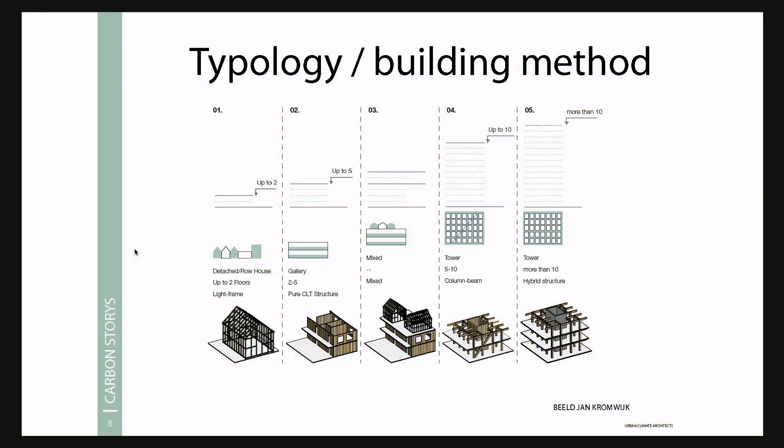What has already been said, you can calculate carbon. So the more wood I use, the more carbon I store. But that's not fair, because I've got a full fat block of wood and I will win. So that's not the case, because then I just store more.

So what we did is we tried to find out how we can make these different buildings, and some are on speed, others are on material, and others are in combinations. All of these have advantages and disadvantages. So across all of these typologies, we were trying to make, for instance, this is typology A, A double accent, A triple accent, to really understand how these typologies work, what we can make, and what we can bring to our clients.

That's a really bad picture, but in the end it says it all. For instance, this is one floor of around 500 meters. We built it here in Rotterdam. This is one week—you can just put it there and it's completely watertight and wind closed.

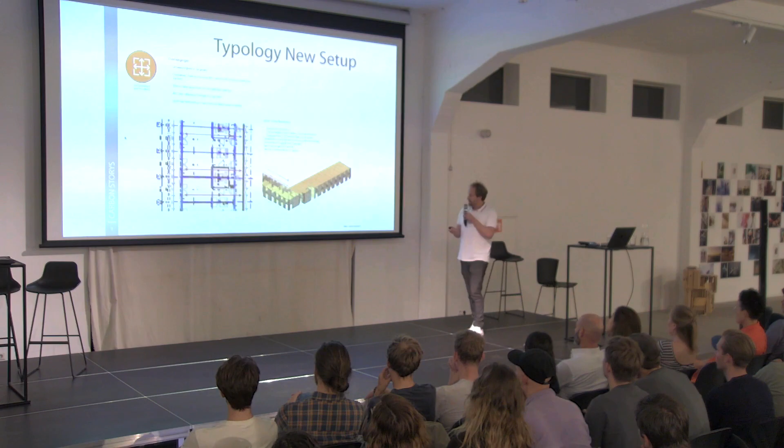What you see is a normal typology you see a lot, a gallery typology. It's really normal. But normally a gallery typology is built up with walls like this, while we turn the facades like this, so we've got a full row of fast laying plates. That's really fast, and I think fast is good, because fast is cheaper, fast is better. So that's one thing. The other thing is I've already got half of my facade, which is also good, because if this were just construction, I'd have to pack it for sound and other things.

So what we did here is try to rearrange an existing typology. And that's what we do now at the office, rearranging existing typologies over and over to keep them fitter, make them better, and then put the right materials in. Because sometimes it's wood, but sometimes it's fibers.

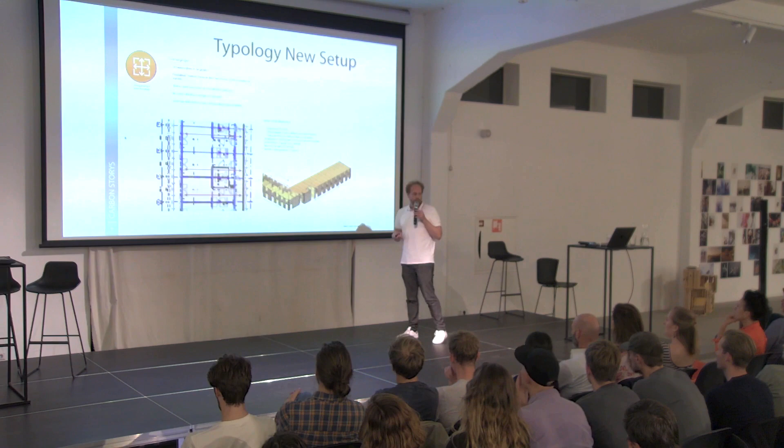But we also have higher typologies. This is another construction—again you see column beam structures, some of which I would probably understand, but they're slower to build. So I have to do other things to compete with this. In the end, it's all about finding—I'm not going to explain all of it, so you can ask—but it's about making use of the right thing.

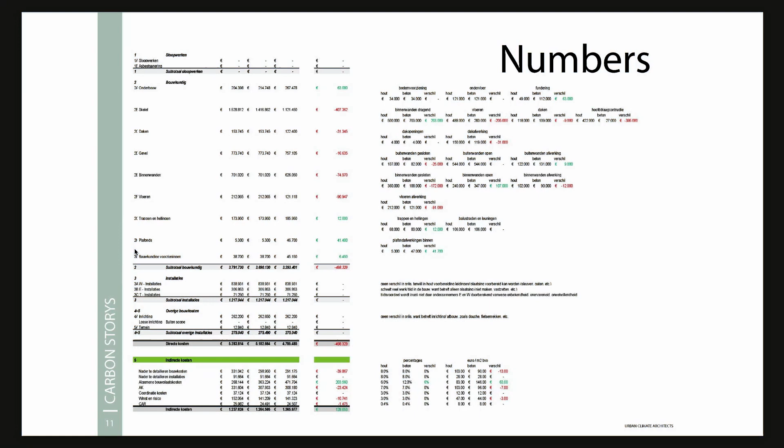So this is an average building—I don't know which building, it's like 40 small houses. I think the budget just fell off. It would be around 5 million-ish.

And then you see what it normally costs, and we break them all down. We break them down in carbon because we know if we use bio-based materials, we're already low. And then we see where can we use them. For instance, in the skeleton, the facade, or the inner walls, we try to replace them, replace them, replace them.

If the material is more expensive, it needs to be faster. If the material is slower, we need to find something else. In that way, we're busy with being in competition and being fast. And what you see now is that we can say out loud, bio-based building doesn't have to be more expensive.

We can build row houses, towers, the examples that you saw, within or even lower the budget of standard buildings. So for us, there's not even a choice. If somebody comes to us, we will say, we build it like this, because if you like money, it's going to be fine. You just got a better building, which is better for the environment. And that you can't say no. If you say no, that's fine, and then we go on because we really want to get better.

And if we don't train, we don't get better. This is also the reason why in our company we said no, because otherwise 50% of the people would work on something which once they don't like, and second, they don't train. They don't get better. They need to train, so if they spend 100% of their time on bio-based, they get faster.

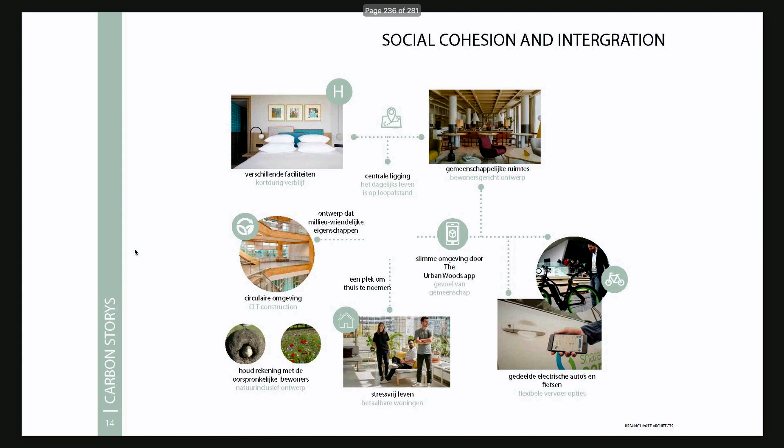I have one example that I'll run through, one building, so you can see how we now start with our buildings and environment. One, we understand the social cohesion. We will see where these are the nice people that are going to live there. No, it's just like the birds, everything's going to be transferred.

So before we go there, this is a building of roughly 30 million. You always ask your client, understand what is there. It costs you 2,000 to 3,000 euros. So if you calculate it, it's not that difficult.

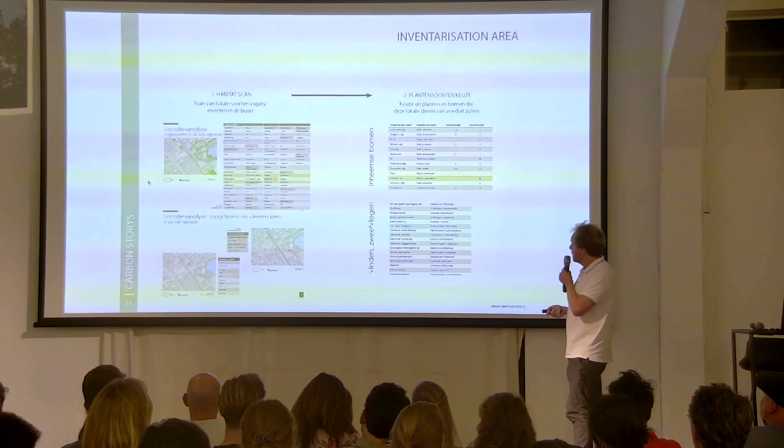Then you understand who to protect or which animals you have to help. Sometimes you can help animals with your building. If you go in, you try to see, even before you designed, you understand the animals. Where are they going to be? It's also not that much work, because in Holland we don't have that many animals.

If you've done them 10 times, it's interesting. And if you're in cities, many animals are the same. So you get fast in it.

Then you understand you have to build with wood. So you have to understand the type of construction, and be in the right corner to search. Being fast in this makes sense, because then you got time to really design. The further you are with your knowledge, the more time you have to be a real architect designing your building.

Here we made a column beam structure because we needed to go to 30 meters. And we're now able to make them without a concrete core. So there's no hybrids anymore, you can just build them. In the end, we will share it all if you want it. It's already been said before.

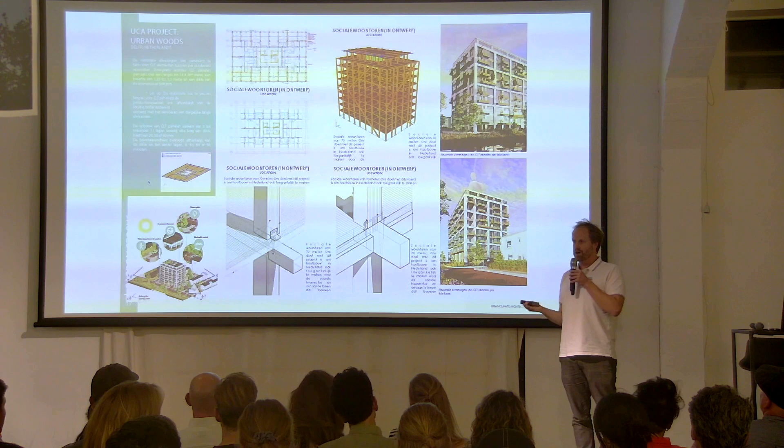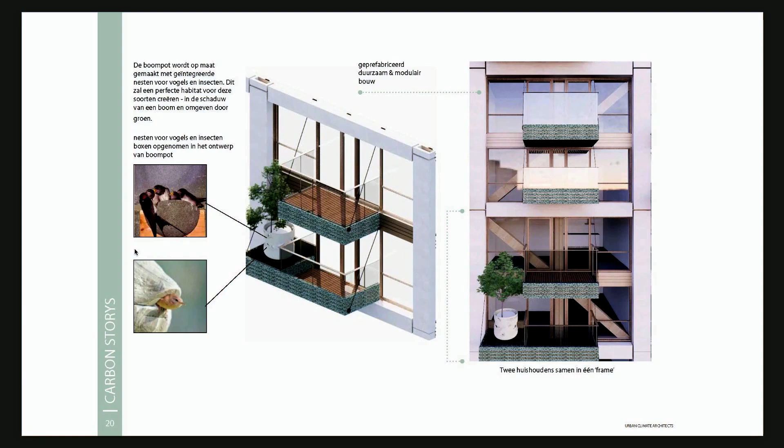We also share the same if somebody wants the diagrams or all the information, it's just for free. Then you implement them in the structure. You see where you can do this, how many bushes and trees which are good for which bird, and then you design with it. How can we design something which is as well good for us, as for the environment, as the needs of what we want to be there. So you need to find some synergy somewhere and try to see if that's possible.

And then it's really simple. What we try to do to get it to our clients is to design something bio-based, which really looks like what we do now. They're all architects here, so they understand that this type of wall is just a wall made out of

Houtskeletbouw, wood, houtskeletbouw wall. It's also been used on concrete. It's really simple, but we fill it with bio-based isolation. It's not really difficult, you can ask it. And it's not much of them, it doesn't matter that much. And you also montage it the same way.

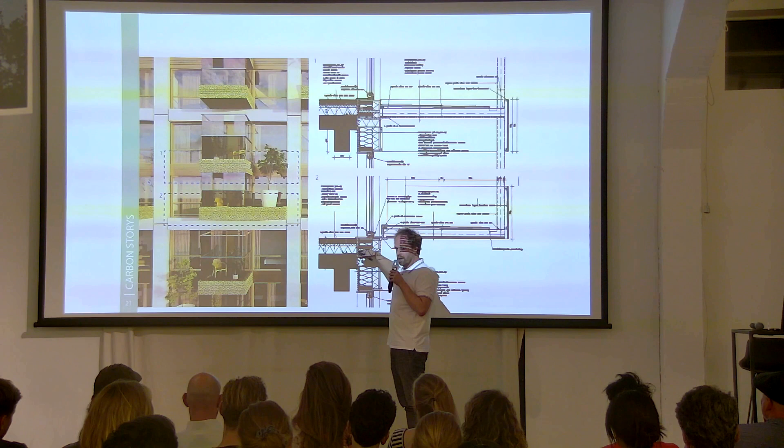The floor also looks like it when it's black, but it's wood. And of course you need to do something for the sound and something for the fire, but actually it's not that difficult. So I would really challenge everybody just to try. Everybody says it's difficult, it's not difficult.

It's just adding some materials. And then, like with every building, you just add the things that you need for your heating, your ventilation, etc. It's again the same what you do normally in your daily practice. Of course, I would like to add some more green, and then neutralize the trees and go on.

And then it needs to fit like an architect to the environment, etc. In the end, and then you have to make. What we actually did, we make menus out of the information that we have for the people that live around our building. Because we got so much nice information. If you project it only on the building, that would be a shame.

So most of the ingredients that we need to attract birds, we can also use for plants in your own garden and make tea or something else, which makes it fun. So these menus are for our small friends as well as for ourselves, and if the whole neighborhood can benefit by it, why not?

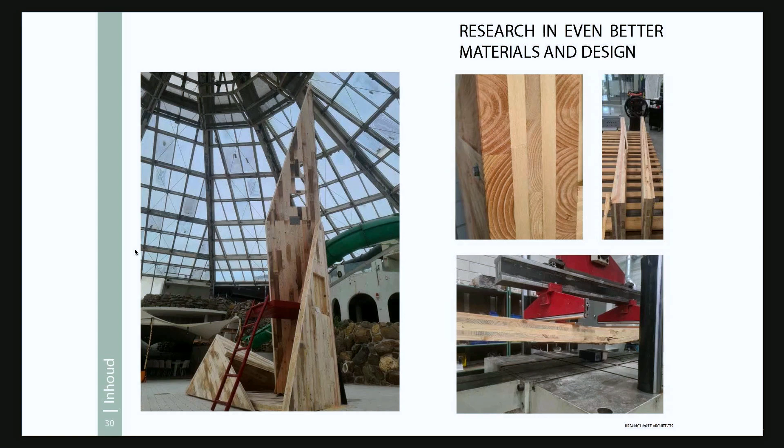We have the information already. And then the last one, it's already been said, in the end we would like to cut as few trees as possible. So together with TNO, we're working now on recycled CLT. We're going to use it in the building that you saw. It's been made out of pallets, and it's possible. The strength is enough.

So that means the whole question, can it be recycled? Yeah, from CLT we can make CLT, and from pallets we can make CLT. So in the end, it is also circular. So we don't have the question about is the carbon stored? Yes, for a large part.

Of course, it needs to be routed, it needs to be well, but a large part can be reused and reused and reused. I don't think it will take long, but these ones are already going to be used in the building that you saw, so we're going to build that one, I think, starting next year, end of this year, we hope. And we already put a percentage of recycled CLT in.

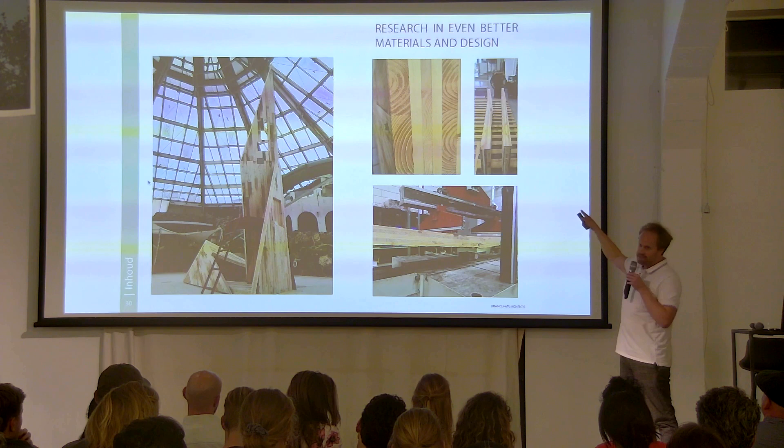In the end, we want to upgrade this, so it can be faster and more and better. And still, even with this, we're in competition. It's the same money we spend on a building as we would do when it would be normal.

And then some practice. What kind of projects can you do? We put some under construction. We have quite a lot actually, because once we stopped, we only do wood or the rest. And the most exciting thing is it's really fun, because finally you can really add something. It's not only the design, you can do research, you can be a pioneer, and then really make something.

And that's important for us as architects. There are many architects. I think in this transition we've got a role. We've got knowledge. We've got the intellect to really see and oversee and overview the whole sector, and we do not benefit by buying things or selling things. So I really think that we as architects got a good role to play here, and play this role carefully with the right knowledge. Thank you.